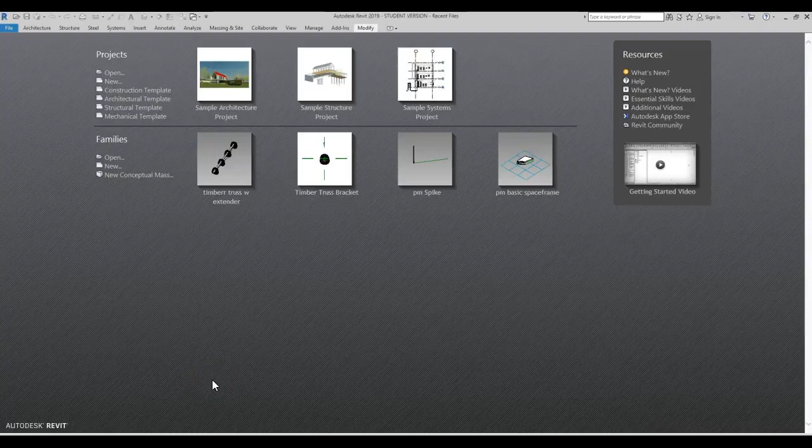For this tutorial, I'm going to jump into putting together a little fancy timber truss with steel connectors and some tension rods. So for this, I'm actually going to start with a new one. We're going to do generic, and this time we're going to look at face-based. Generic model face-based, open.

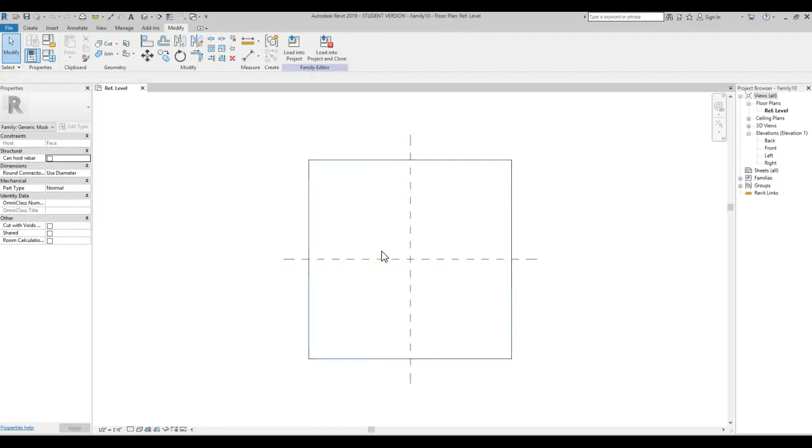And this brings us into a different world. This is a little more of the traditional view where you're looking like in plan view, front, back, left, right, and elevation. There's an object here, and the idea is that this thing can be placed on the face of an object or on a work plane, and that's actually why I'm doing it.

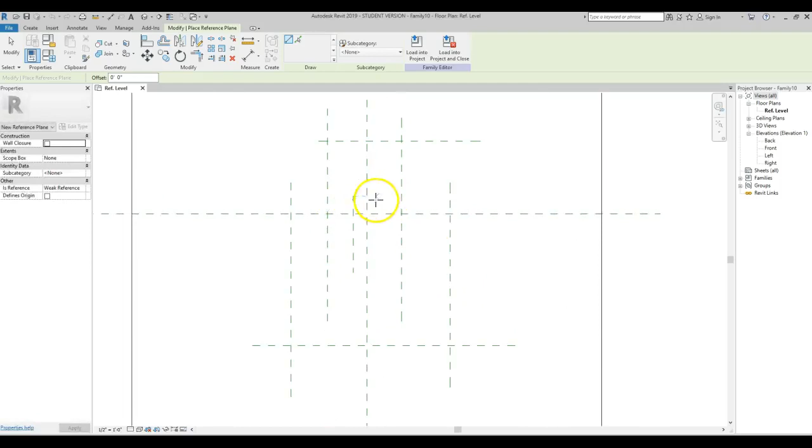But what I want you to do is start making what are reference planes, and these are things that we can control. We're building the structure for something. I'm going to be doing this kind of fast because I want to achieve a few things. Now, with Revit, it's all about doing stuff quick and loose and making it exact after.

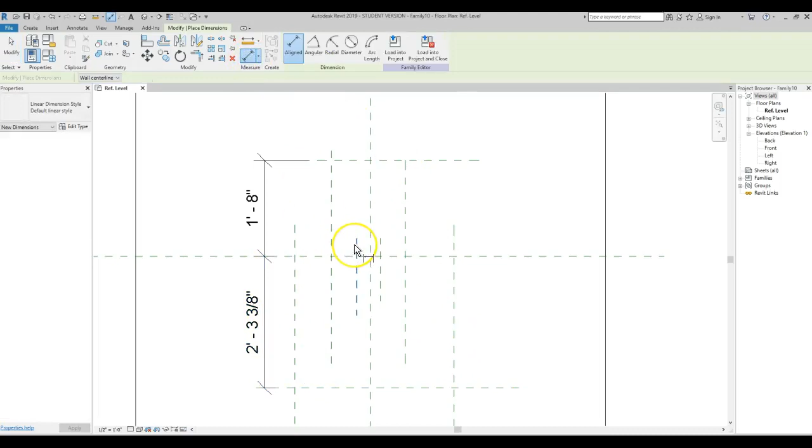I'm making the dimension real. This is a little trick. If you do the dimension, I grab one and then the middle and then the next one and click off to the side, I can hit equal. That makes them equal. One, there, and off to the side, equal. One here and here, off to the side, equal. Okay, we can come back and make these what we want.

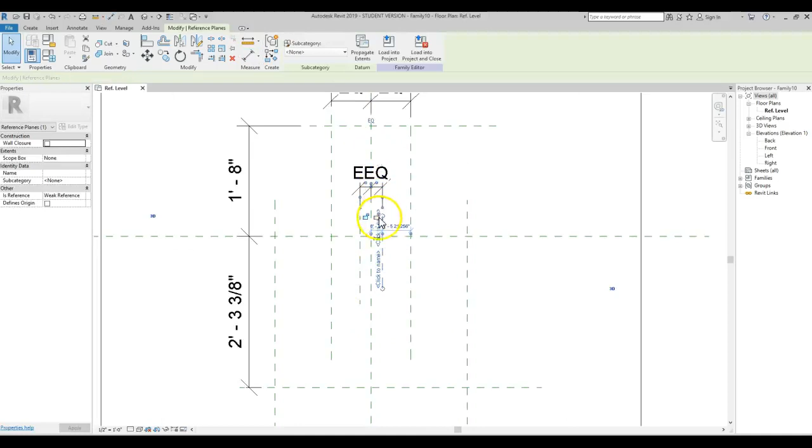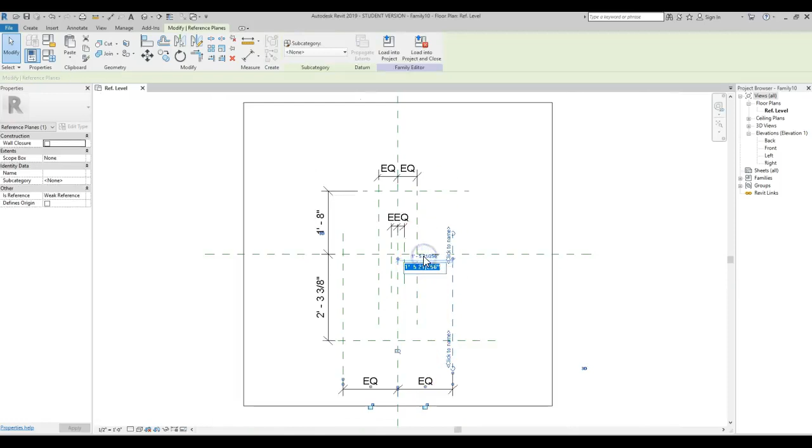Let's say this is at 2 inches. This one, let's make that 6 inches. So I made both 6 inches. I'm making this one from the center line—let's make that 2 feet, a little wider. So it doesn't matter where the dimensions are. Now I've got this kind of outline of stuff.

Now with this, it's got some basic things set up like extrusions. We're going to do extrusion, and I'm just going to make a quick box here. Again, it's all about blocking—aligning stuff and using it. I want this to extrude up, let's say 4 inches, and start the extrusion at negative 4 inches. So we're keeping this center line, the plane that it is, as a center line of it, so that we have this going right now.

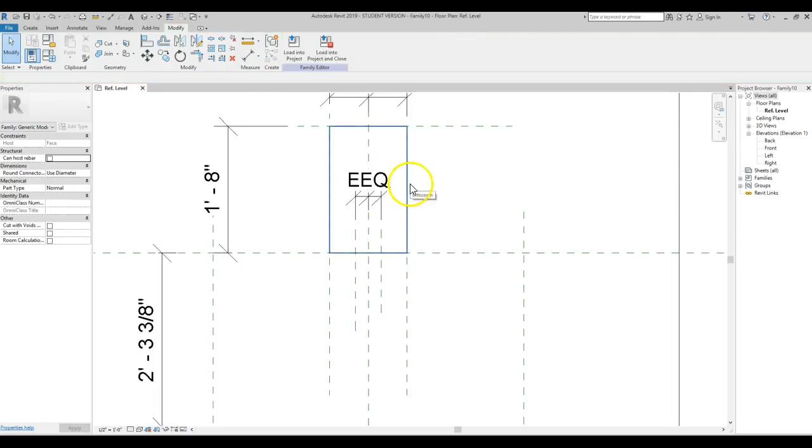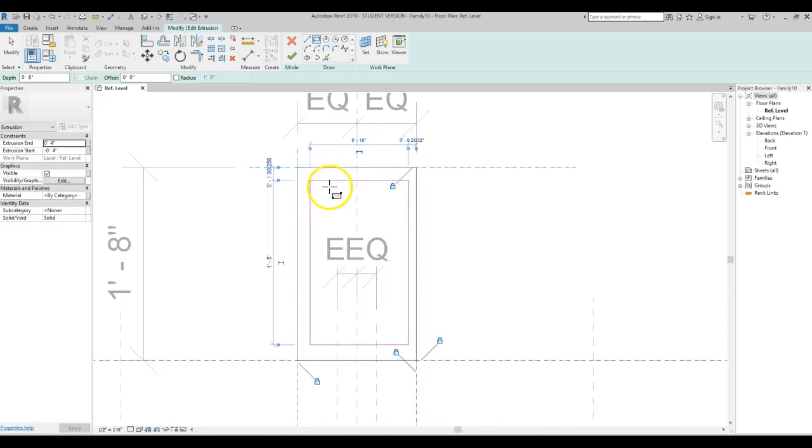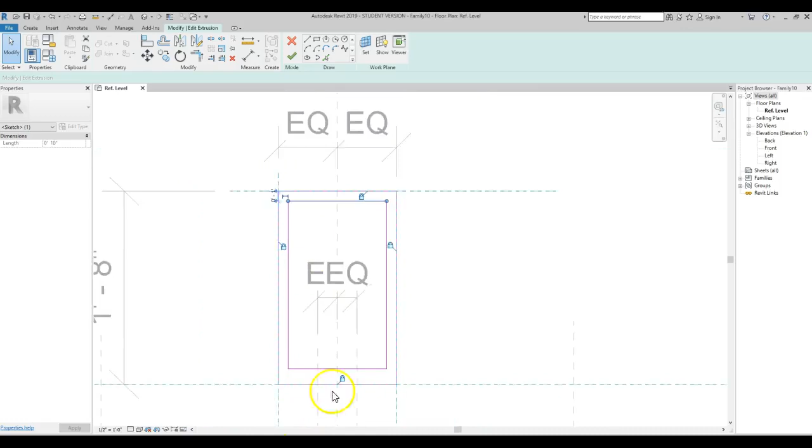Actually, I realized I want to go back and edit this a little bit. So I can just double click into it. I'm actually going to put another box inside this, and watch how it automatically... I can actually tag some—let's say this I want to be 1 inch, and this I want to be 1 inch. That should be 1 inch and 1 inch.

Now watch what happens—it automatically knows that it's an element. Control T, back to there. All right, so that was one little element we want here. I'm also going to make some legs.

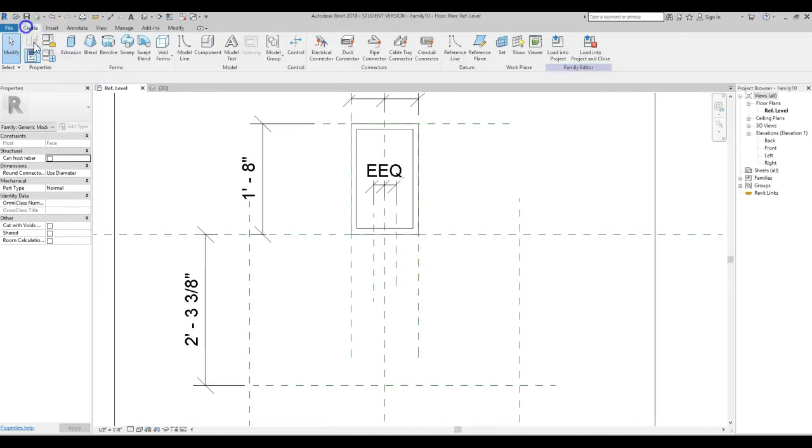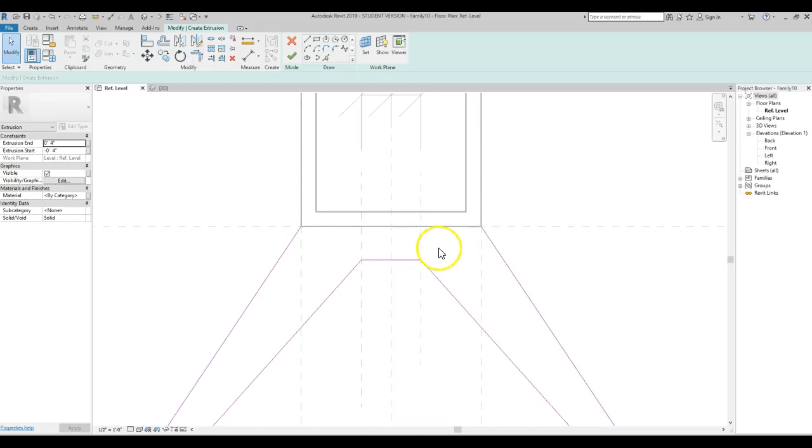So I'm going to create extrusion again, this time just using the line. I'm going to go from here out to this point, come back to here, come out to this connection, come to here. Now watch what I'm going to do here—bam, bam. Okay, and now I have this thing.

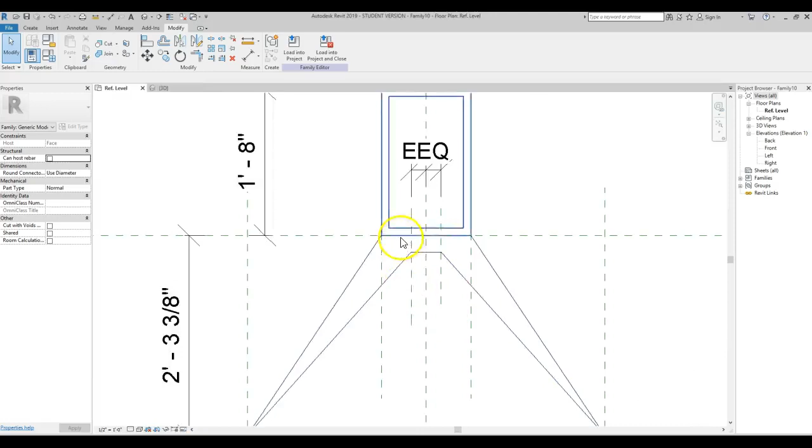I'm going to do this, let's say 1 inch up and just 1 inch down. That's good to me. Okay, tab back. Now we're going to do another create extrusion again, but this time I'm going to do circles.

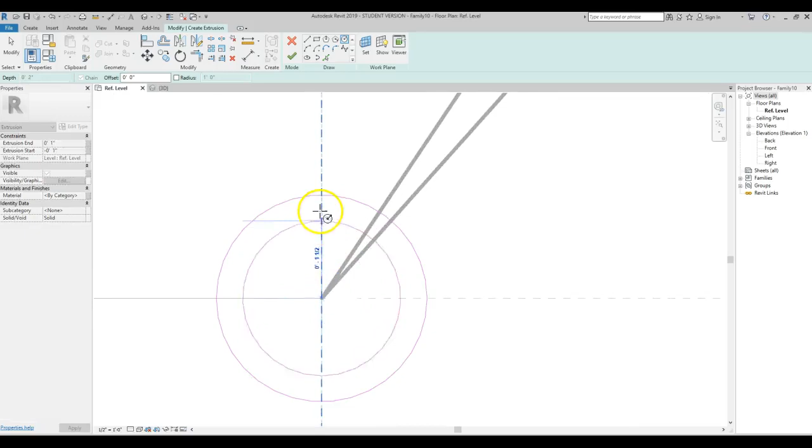I'm going to go from this point, do 2 inch. I'm also going to do another one that goes 1 3/4. I'm going to go here at the same time, 2 inch. I'm going to do another one, 1 3/4. Now I'm going to do this at 2 inches, 2 inches.

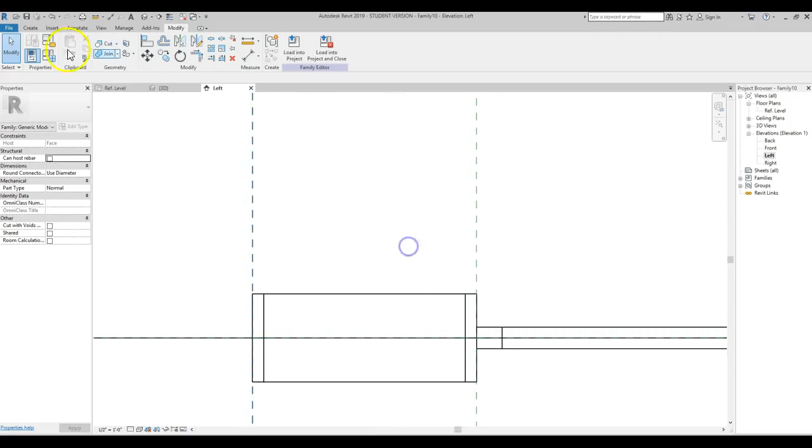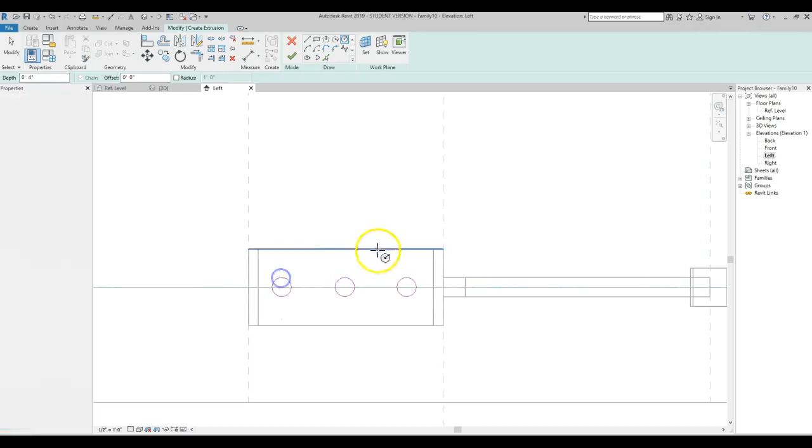All right. Now I'm also going to look at the left side or right side—it doesn't really matter—and I'm going to do almost the exact same thing. What we're going to do here is create, do 1 inch, 1 inch. Let's do 3 of them. Now I could be measuring this and making it exact, but that looks fine to me. What's nice is that this is placing it on that center line, so I'm going to extrude out, let's say 4 inches and negative 4 inches.

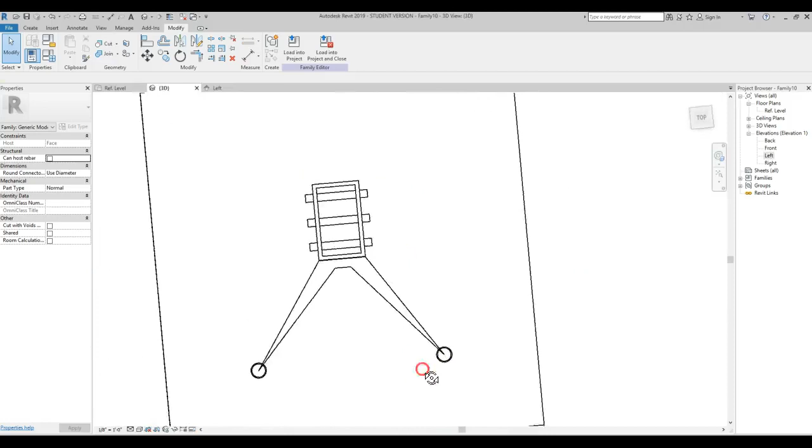Okay, now all of a sudden we have a bracket. This is going to be a piece of our truss. I can actually take this element and say I want it to be a structural connection.

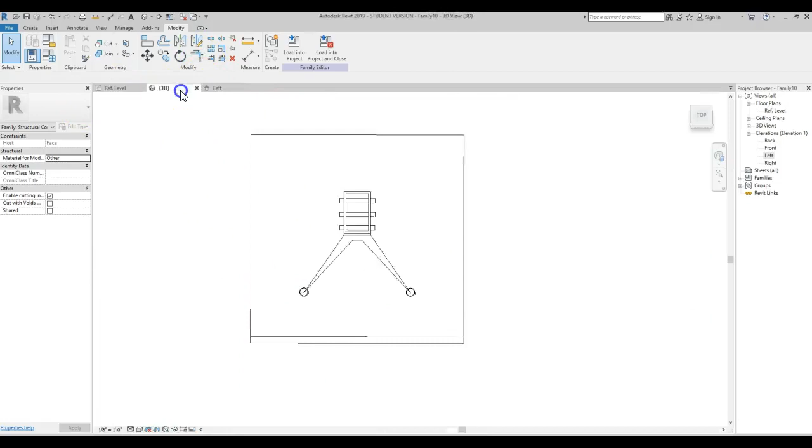Okay, nice. Now watch this. So now there's 3 different views up here. This happens a lot in Revit, you get tons and tons of views. I'm going to hit WW, it instantly goes to just one. It doesn't close the file, but it closes all other windows except the one you're in. Super helpful when you're doing tons of stuff.

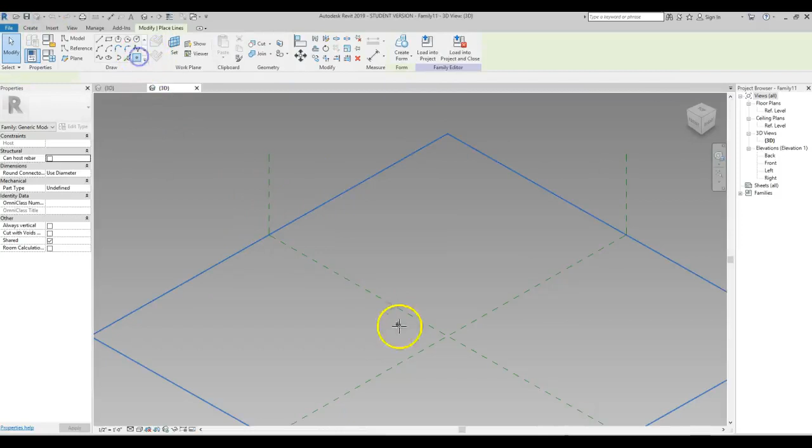So now File, New, Family, Generic Model, and we'll do the generic model adaptive. With this, we're going to put 1, 2, and 3. Doesn't really matter where they are, but I'm putting 2 in a row and 1 on the side just so I can keep them. I'm going to make sure 3D snaps on, reference line, make sure it's actually on it. Escape, escape. And I'm going to put 4 points on this. 1, 2, 3, 4. It doesn't really matter where they are, but I'm going to look at that one. I want these 2 going from one end, and these 2 going to the other end.

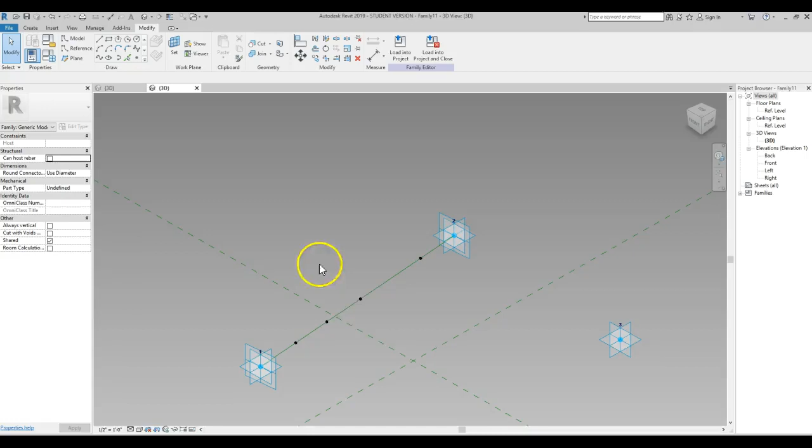So now I can grab these 2 and say I want this to be at 0.33, meaning 33% of the line, and they're both coming from 33% of the 2 ends. Now I'm going to grab these 2 and say I want them to be at 0.1, so like 10%. Okay, this is pretty nice.

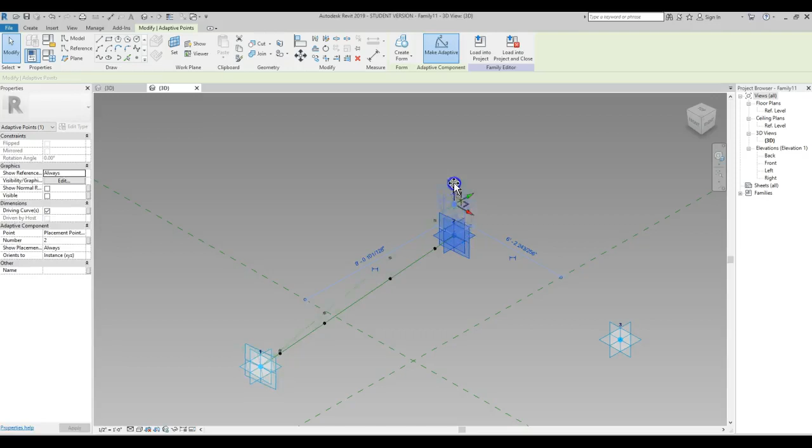So I can start right now by saying, just move it off so we can kind of get some dimension. I'm going to go Control Tab, load into project. Automatically comes in. Now it's like, oh, it doesn't know where to put it.

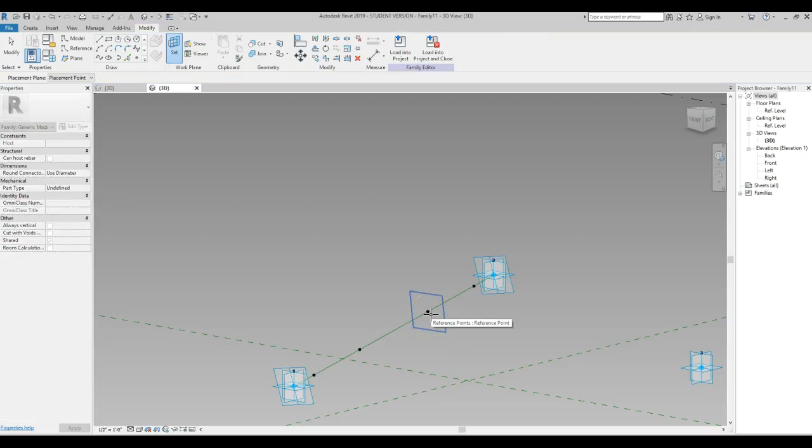This is really kind of dumb, but I'm going to go SW, select that one right there. Okay, so now I got that. It's still telling me no because of this thing up here. It wants to put it on face. We want to put it on work plane, and now all of a sudden, boom.

SW, pick that one. It switched it again. You got to go work plane. Boom. Now all of a sudden, I've got my 2 brackets here. I'm actually going to put 2 more in.

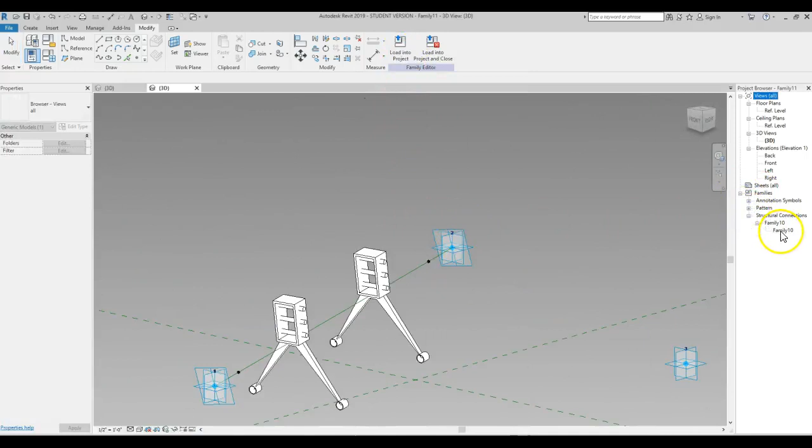Family, structural connection. Base, SW, oops, got to do it again. SW, face, there. Okay, so I've got 4 of these things in, right?

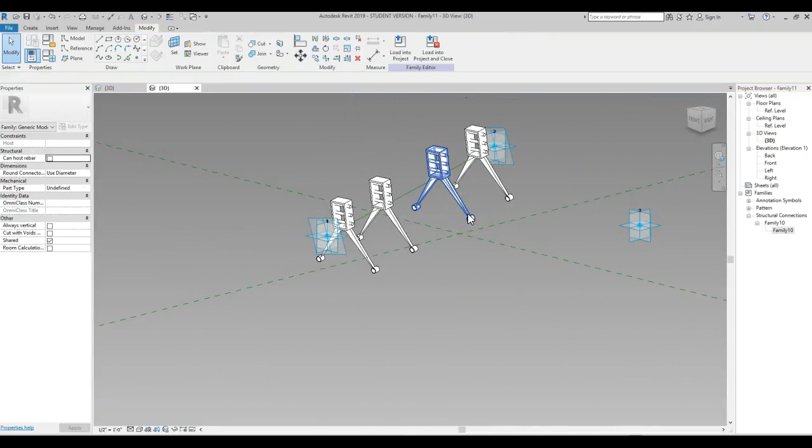Okay, now we're going to do something interesting here. Remember, you can go Control Tab or just double click on that and it opens up this file again. I'm going to grab these, oops, this, maybe some. Okay, grabbing those 3 pieces down here.

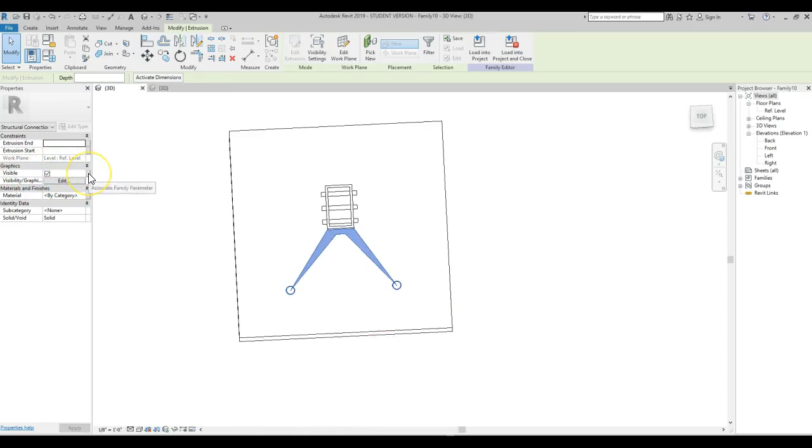I'm going to say, see, there's this visible line. I'm going to make this an associated parameter, so I'm going to call this off legs, and it's going to be an instance.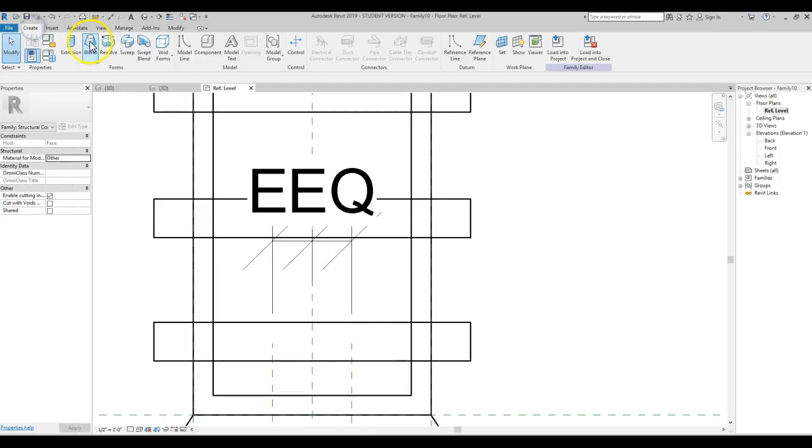Okay, now I'm going to make 2 more things here. I'm going to look in plan view, and I'm going to put it right here. I'm going to create extrusion again and a circle.

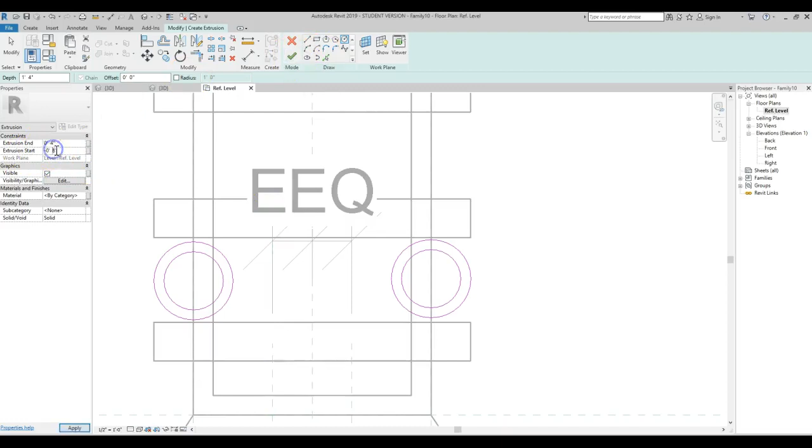That's fine, let's make this 4 inches. It's a little sloppy, but it'll be fine. Well, I want it to be less than that. Looks like I can just jump in here and say 2.

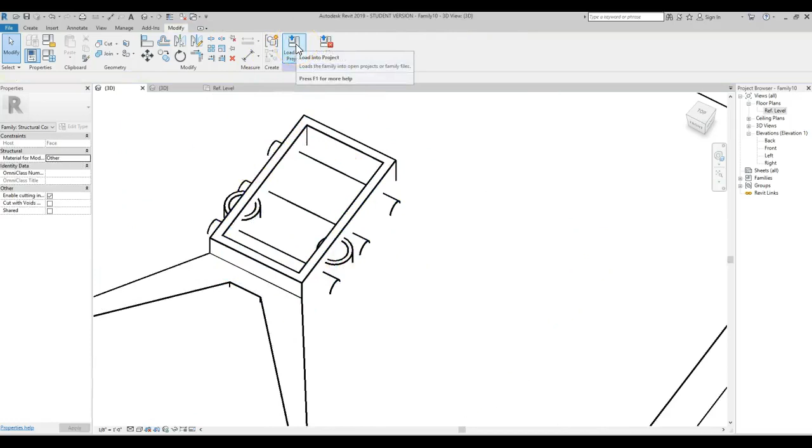Now these two things, I'm going to change their visibility, make them a new one, and say off end connections, in an instance also. Okay, now this is really nice. So I'm going to load this back to the project, say overwrite existing.

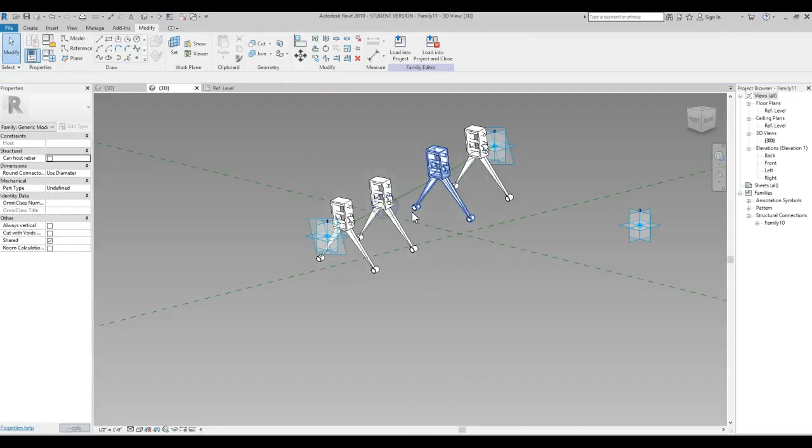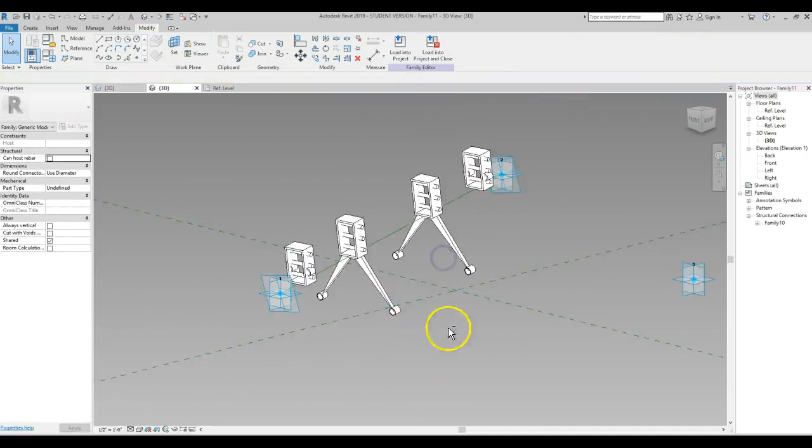Okay, these things now, I want these two center ones to be different than the two end ones. So let's say with the end ones, I can grab both of these and I look over here, and I've got my, because I made them instance parameters, I have them right here. I want the legs off. These two, I want the end connections off. Now all of a sudden with that model, I've got different variables, right?

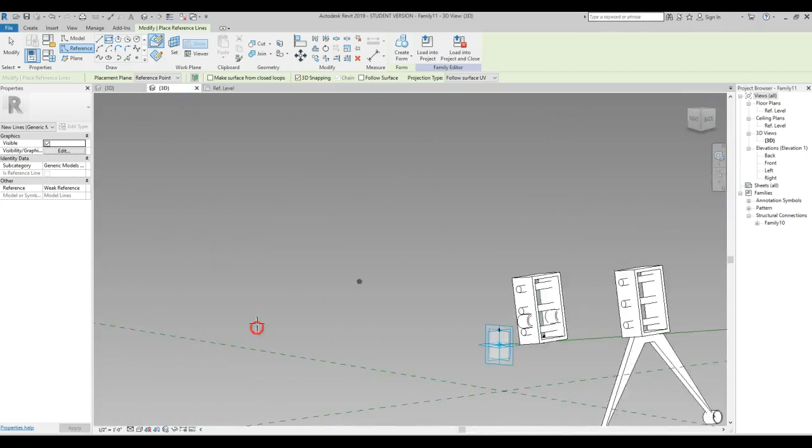Pretty nice. Okay, now what we're going to do is actually just, because we have the framework for this, I can actually take reference line and snap to there, to there, and then I'm going to snap another one from there to there. Grab that reference line, and that reference line, and make an object. Now I've got my beam.

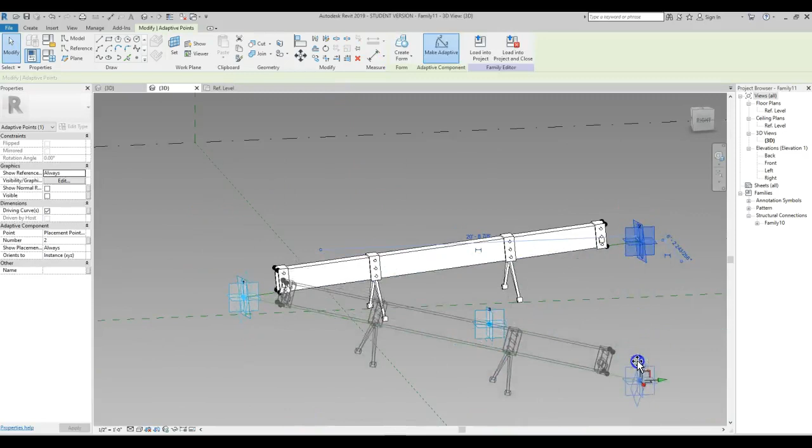Let's make sure this flexes. Ooh, look at that, all perfect. We're going to deal with some end caps in a second here. But what I'm going to do now is...

Let's load our generic pipe. Yay, because we use this all the time. Generic pipe, I'm going to double click on this and I'm going to duplicate and call it truss cable, and offset 0, pipe diameter 0.5 inch.

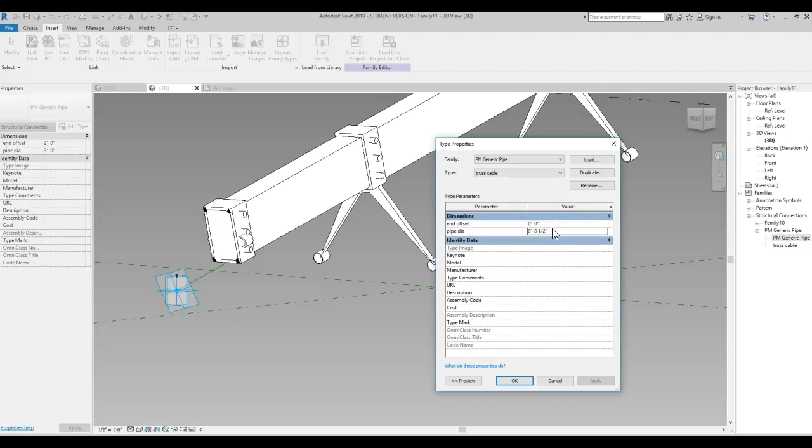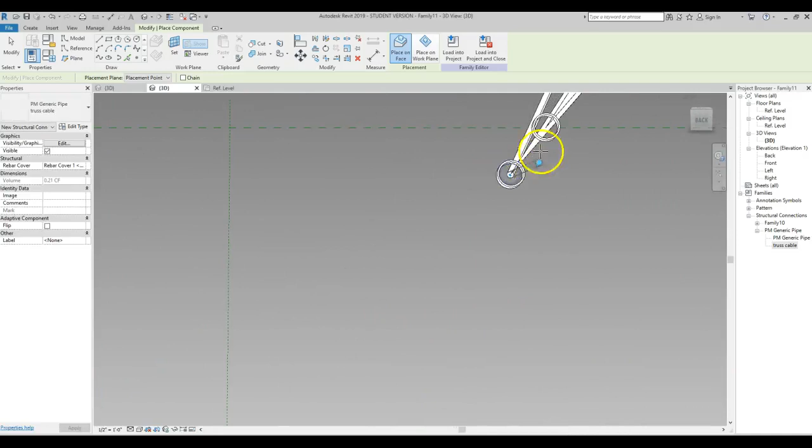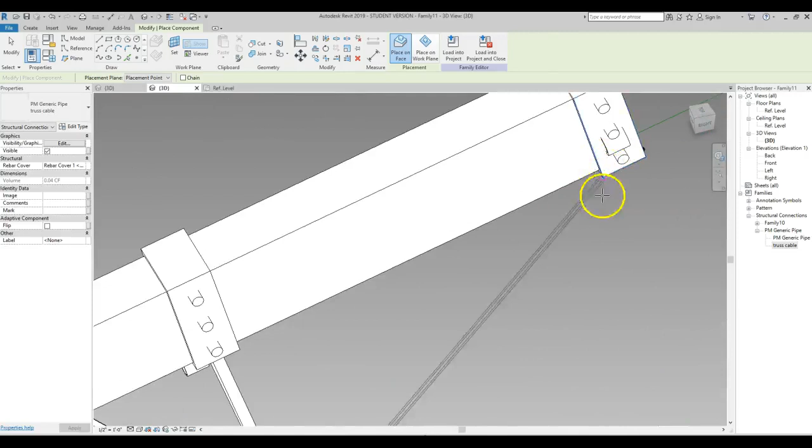Okay, now what I can do is, I don't really have a certain spot, I should have made an actual spot. I'm just going to grab from that center thing there, but I can grab to there. I'm going to grab there, to there. Delete those two. It'd be a little cleaner, but this is going to be a rough one just to start. Those two are wrong. And now let's do the other side.

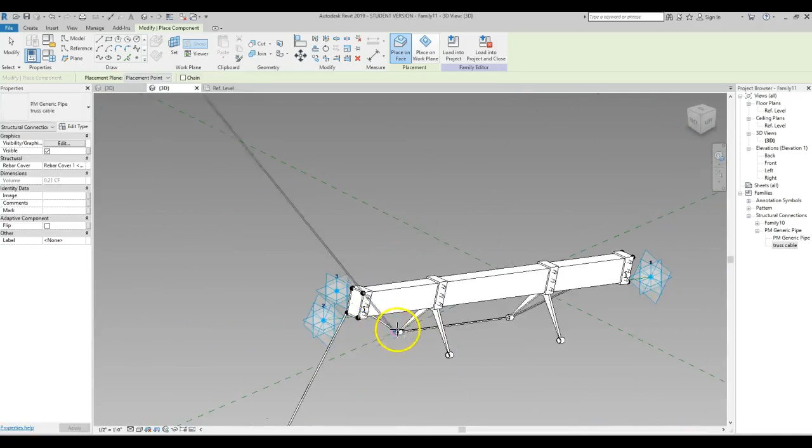Should have given myself a physical thing to grab onto right there, and I didn't. Just leaving the intersection of guides.

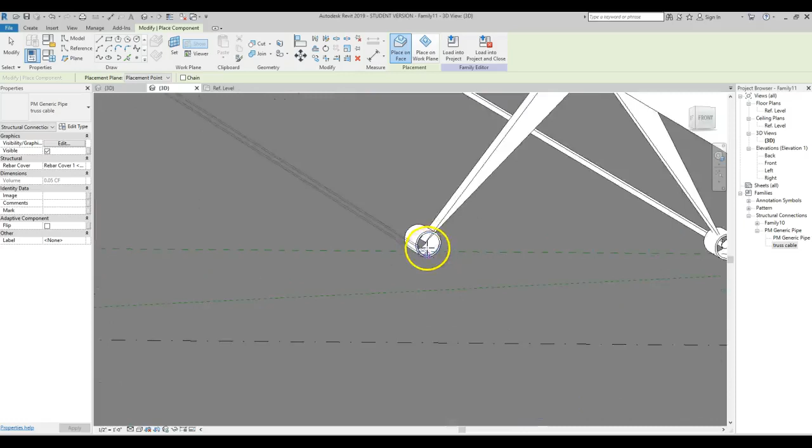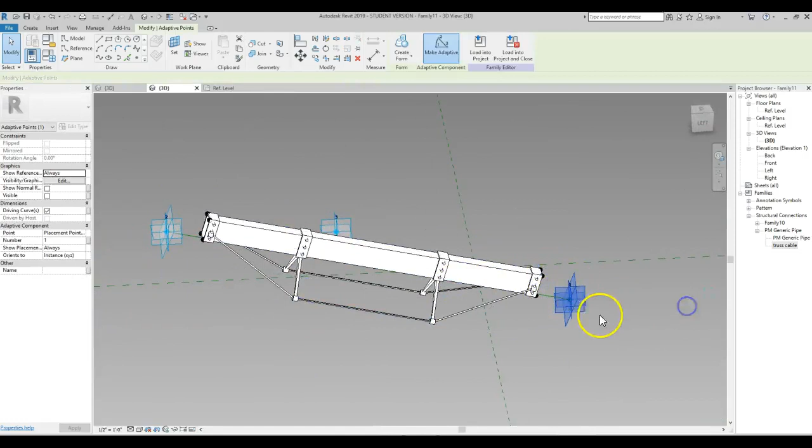All right, there's one. Now let's fix it. All good. All right, so now we have a truss going.

Now we're going to do something else here. I know we made the box, and I remember we went from the outside end to outside end. Now what we're going to do is 1, 2, 3. So the first end is going to be the back end, and I'm going to do this.

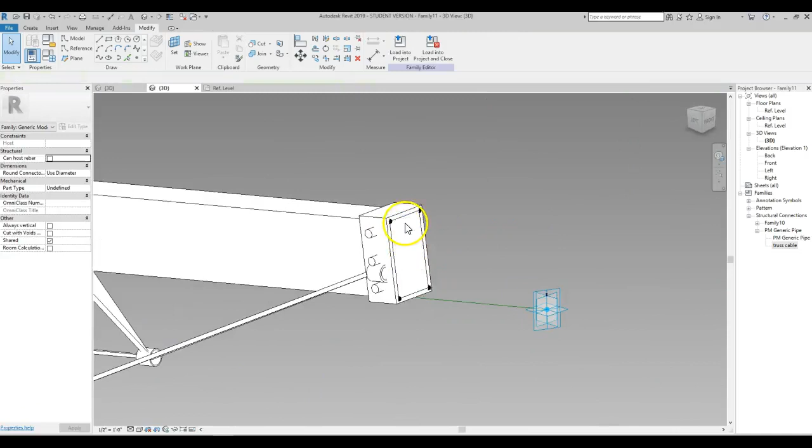We can actually now grab this element. Actually, let's grab that again. I'm going to say make an object, and now I want this to be a variable. So it's at 6 inches now.

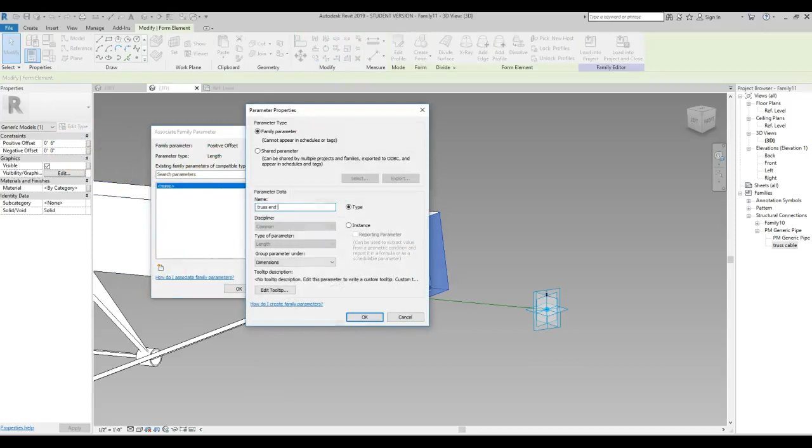I'm going to say new one, truss end extension, and it's going to be a type. I'll come in here and say truss end extension. Let's make it 4 feet.

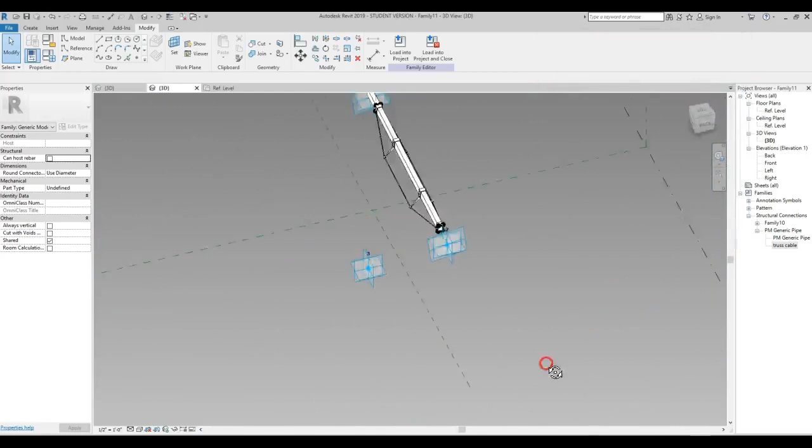Okay, come in and change that whenever. Now we're going to do the same thing over here, but we're going to make it a variable. We're going to make it adaptive.

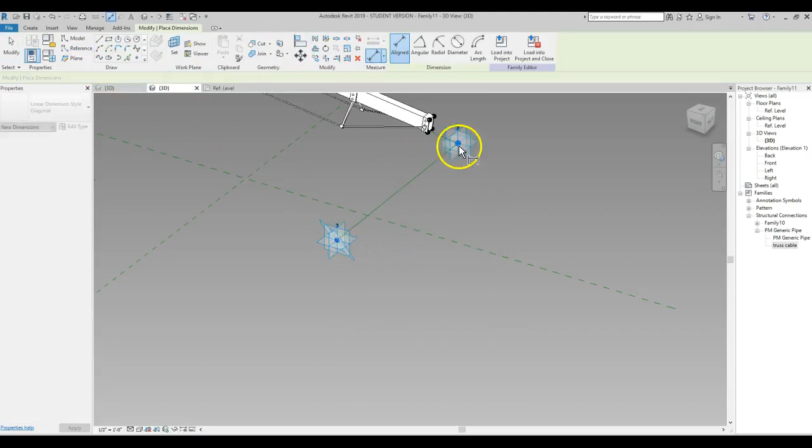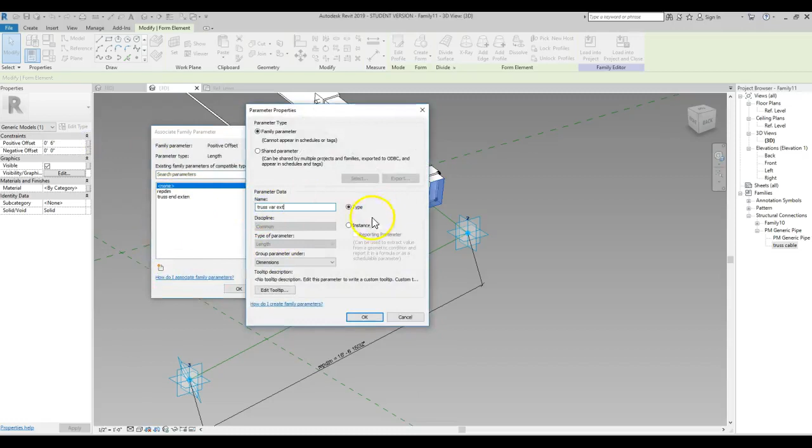Okay, now let's grab this one and create form, and we're going to make that truss variable extension an instance. Now it's not reporting, but it needs to be an instance for it to understand that.

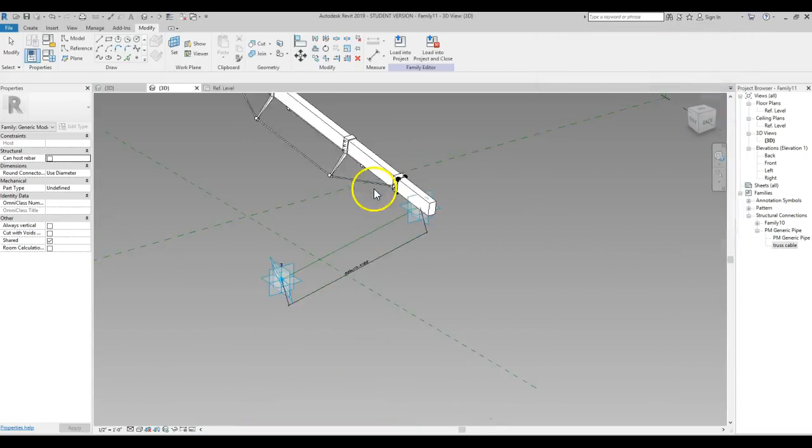Yep, I want it to be crazier, I think. Let's go dimension divided by 2. Okay, now...

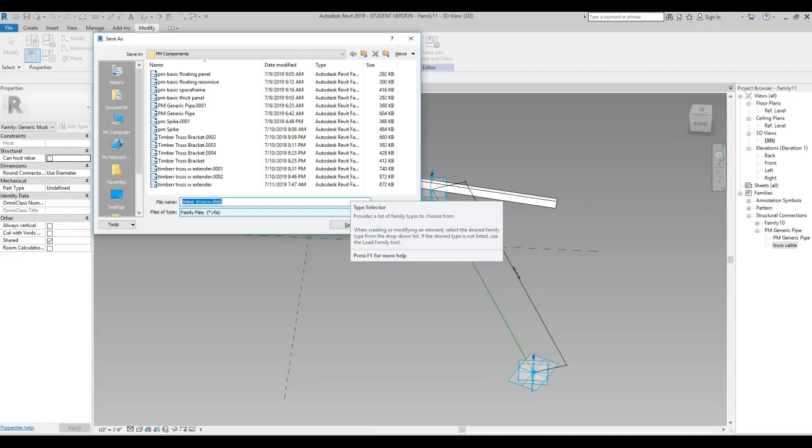Let's save this. File, save. And let's call it Tim. I already had timber, we'll do it, steel. Okay, now let's see what we can do with this.

Let's go file, new, conceptual mass. Mass, okay. And let's look at, oh, this is really nice.

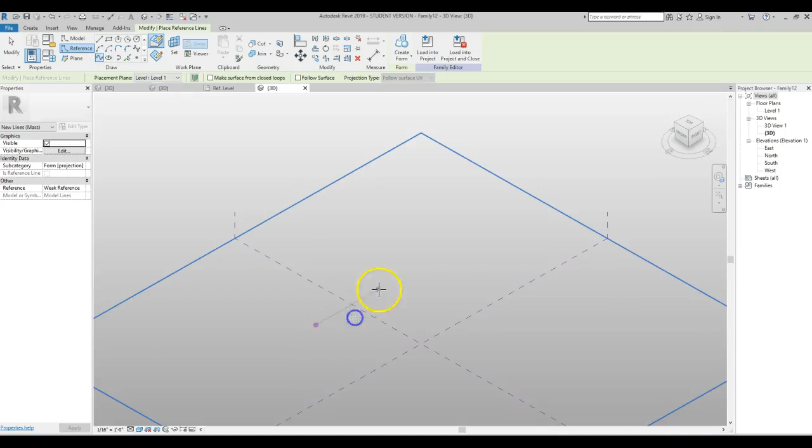So what we're going to do is go reference line 1, 2, 3, 1, 2, 3. We can do this kind of simple. Okay, so we've got 2 lines here.

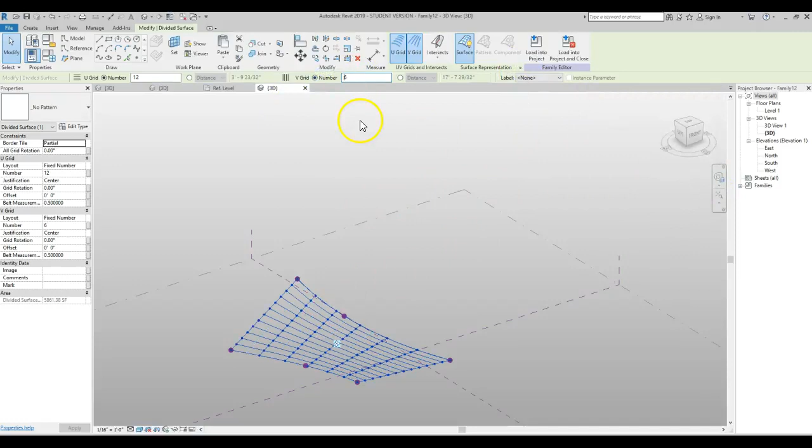Create surface, funky surface, divide it. Remember, show nodes. And okay, let's make one of these like 6. Okay, this is really interesting. So even though there's all this grid here, what happens?

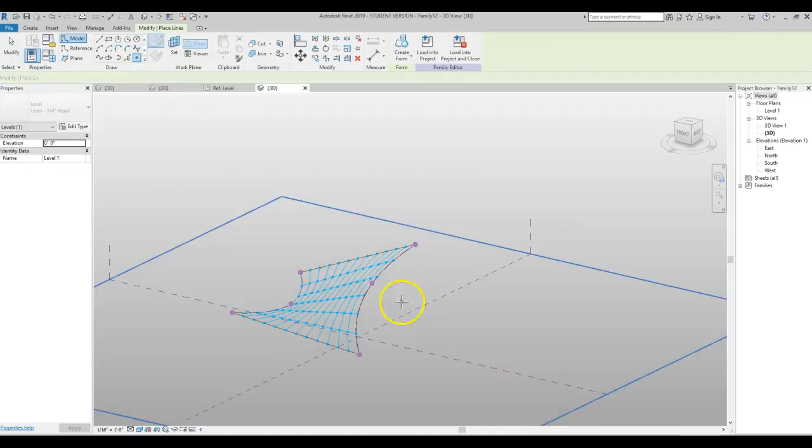I control tab. Let's load this into conceptual mass. Oh, escape, forgot I need to have a third point. Control point. Let's leave it there. No, let's put it way back over here. Yeah, like that. Okay.

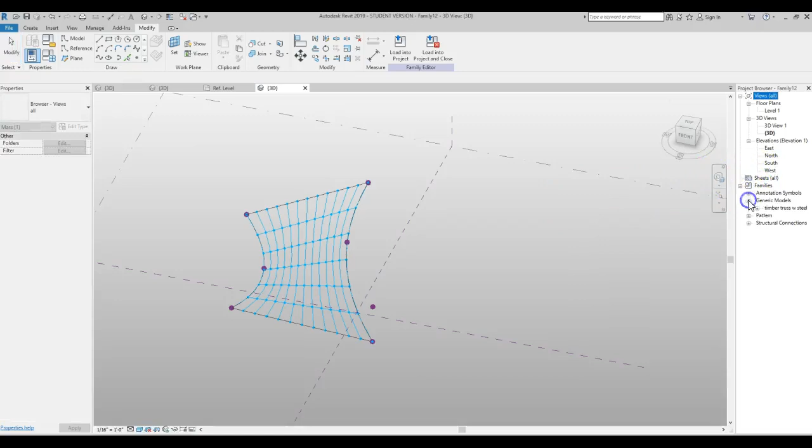Now that's this. One, 2, 3. And there we go.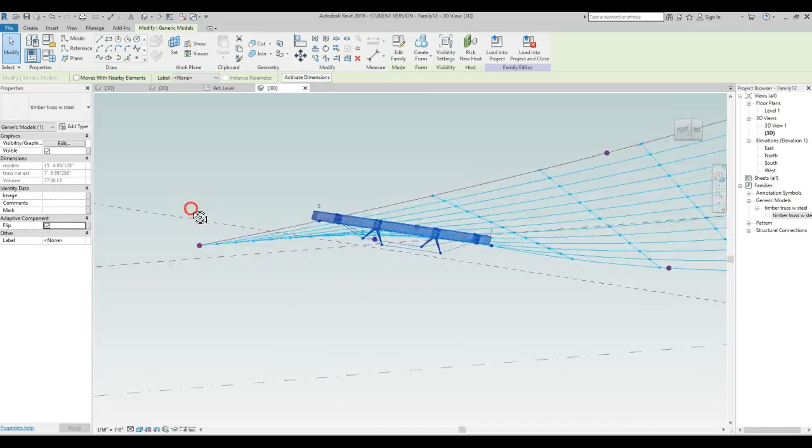Oh man, it's upside down. Actually, let's see. I think flip turns it right now. There we go, perfect. But notice it's not...

The orientation is kind of weird. This is because we didn't control. Remember, it's... so watch what's happened.

Let's... not being controlled very well, right? So each one's kind of rolling and doing stuff. So we need to have more control over this.

Which means we grab this one and grab this one, and we say they're going to be global Z, host XY.

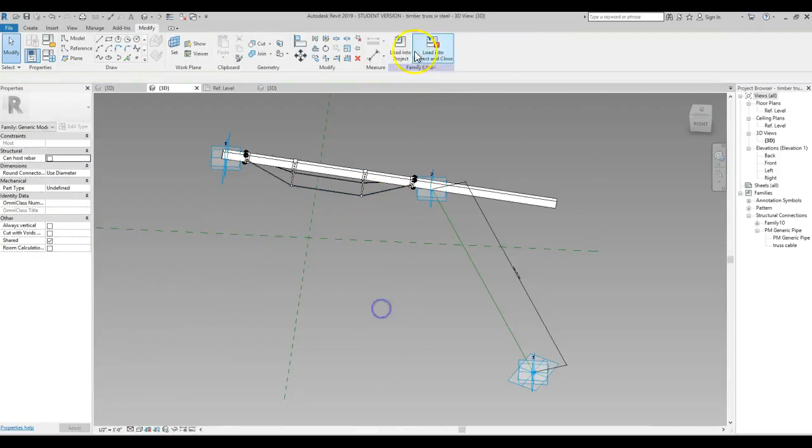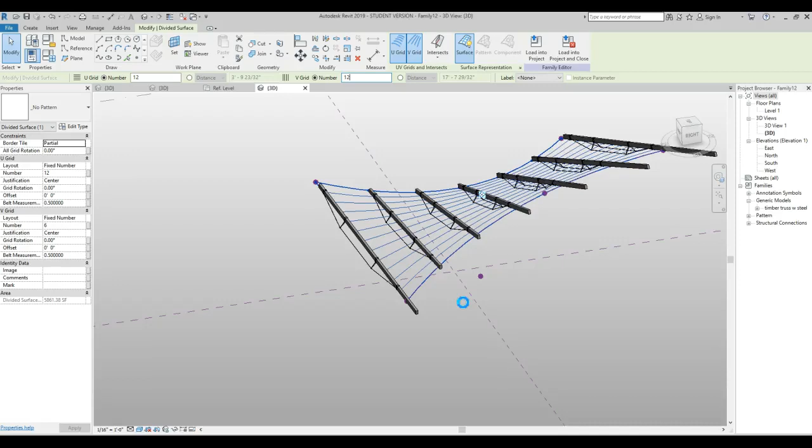And there we go. Now let's grab this again and say, let's bump that up to 12 again. And look what we have there.

Now what's really interesting here is this surface is still available. Remember how we were dealing with those panels? So what I can do is actually go insert, load family. What was our basic space frame?

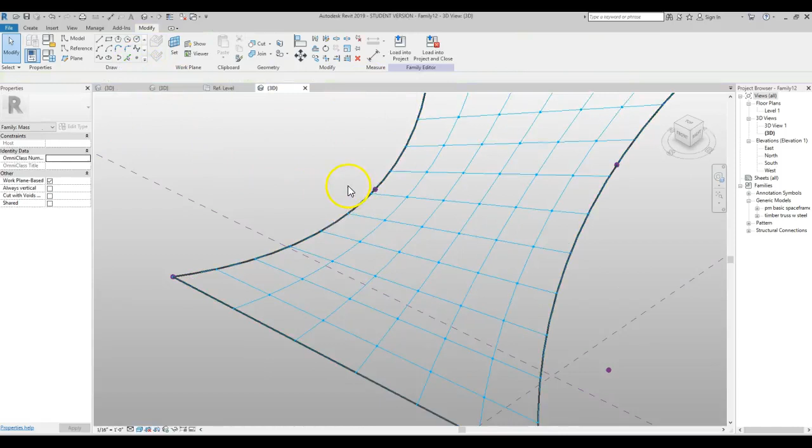Okay, now I can grab this and I can still, I'm going to turn it down a little bit, I'm going to turn this down to like 6. Oh, I would have to reload again. I'm just going to leave it the way it is. It'll work, and I can come in and go space frame.

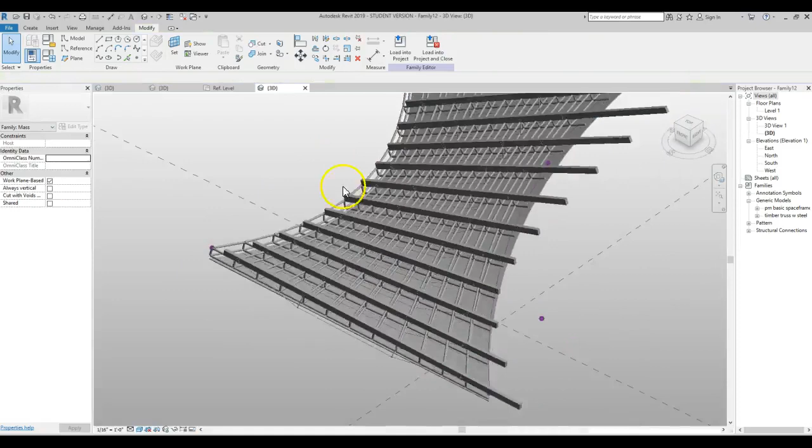All right, and now we've got a space frame surface, we've got all the elements coming together, and they're all going to match up because they're all relying on the same thing.

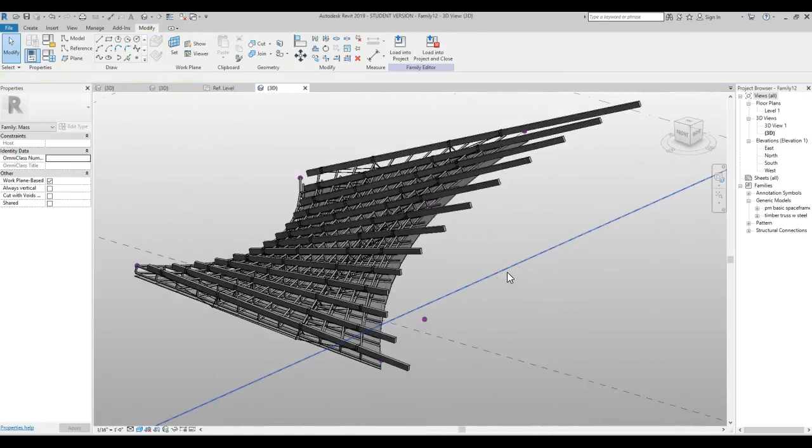We still have the ability to come in and modify the line, which modifies the element. I can modify the point that's controlling, which will change the extensions. This is where it took 20 minutes, and we've got something that we can always go back into.

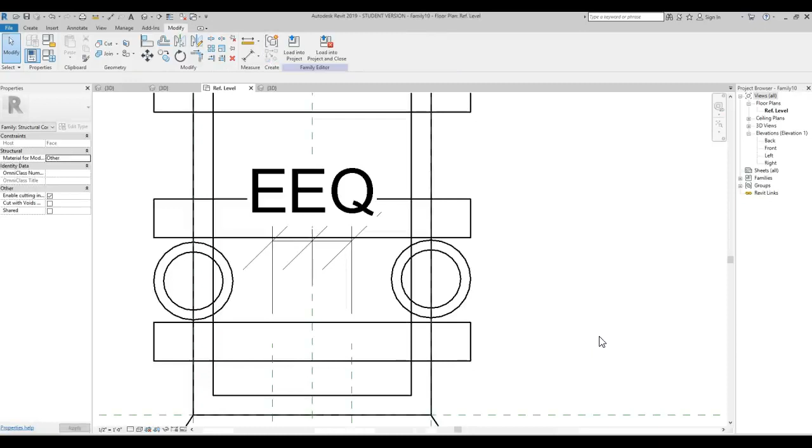And I can even, let's say, tab, tab, tab, tab, tab, like this. We can come in and still add more and more detail and still reload it in so that this model's getting the detail that we want as we make more and more design decisions. So that's all for today.